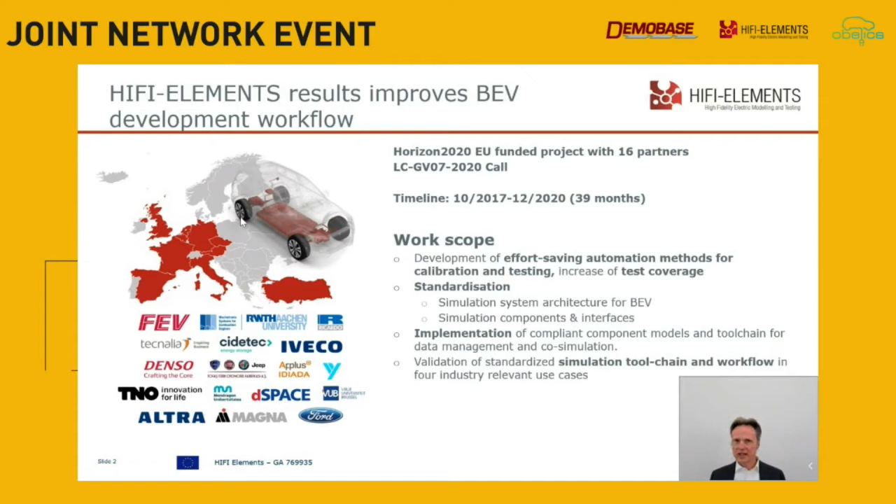All of that is being validated, not against, let's say, 11 use cases, but we have 4 industrially relevant use cases; currently it's still ongoing. And I'm happy to show you our results. We are 95% finished now, how far and what kind of results we can gain with our developments. So I want to make it very simple in the very beginning, because there are lots of technical things that you will see during the run of the day.

Where do we need conventions when it comes to simulation and testing of battery electric vehicle components? Very simple, you have this vehicle here, and I will just pick out 3 of these components: the battery, the inverter, and the e-machine next to the mechanical transmission. And that needs to be simulated. How do you do this? You want to do this, for example, for model in the loop, where you just do the simulation, but later on you also want to pick out one of these components for hardware in the loop, where the rest of the whole vehicle is being simulated.

I will leave out the thermal discipline. I will leave out the controls, that comes later. So we know the physics of this. There are electrical currents, there are torques that have to be modeled. These modeling components have to exchange signals. And sometimes it's very easy to do it. For the mechanical system, the e-motor has to communicate the torque to the transmission and finally to the vehicle wheels, while those will feed back the speed of the rotor according to the speed of the vehicle.

Also, the communication of the signals, it's not really that you have to model plus and minus currents. You say, okay, I have to model the signal of the electrical current, which goes from the inverter, what it wants from the battery, and the battery finally tells, based on that and the current state of charge, what voltage the battery can deliver.

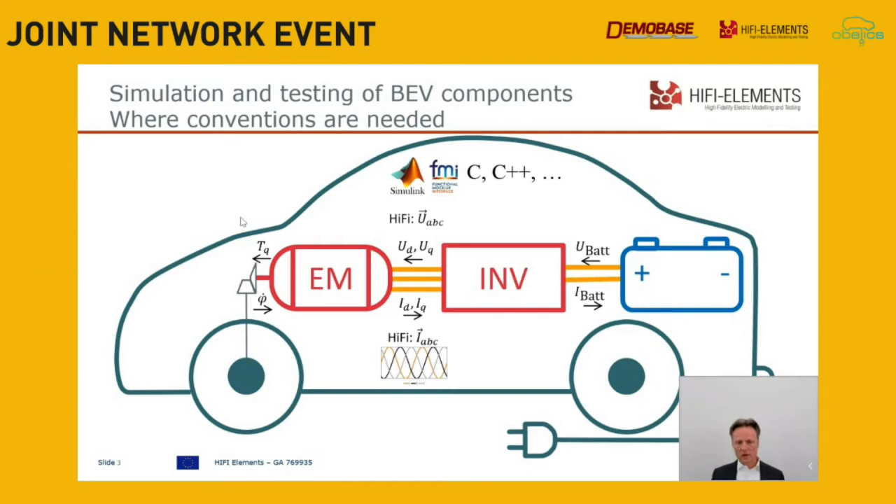If you see this in a bigger picture, for example the simulation or development procedure, you start in different phases of the development of your battery electric vehicle. You start in the project concept phase in the very beginning, and you want to end up with your vehicle investigations or the test bench investigation. Initially, you have very fundamental questions like, what is the best vehicle concept? How many EMotors do you want to have? What about the battery? What capacity do you need to fulfill all the requirements from the customer level?

What kind of EMotor do you want to have? Do you want a permanent magnet machine? Do you want an asynchronous motor, on which wheels, front and back? Maybe you want an EMotor on each of the wheels. This is what you start to think of, and then you start to talk to the suppliers. Initially, you have just very rough approximations of how these models will behave. Once you have made the decision, you start to discuss detailing phases with the suppliers.

You will then switch the focus from the system level to subsystem levels, where the individual development teams start to optimize the subsystems in more detail with the information from the suppliers. Where before you worked with low fidelity models, here you start with high fidelity models. You have very high time resolution, and you do simulation and optimization, but it's not real-time capable. But when introducing controls in the subsequent steps, you have to become real-time capable. So again, you have to switch your models and go back to low fidelity models, but real-time capable.

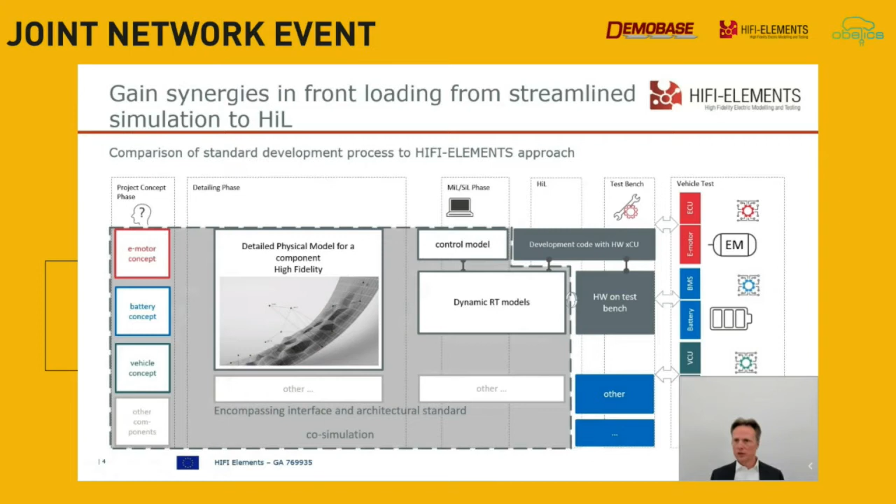We also introduce co-simulation, which helps you integrate heterogeneous simulation tools. So you don't have to limit yourself to FMI or FMU only, but you can also include, by means of co-simulation, commercial tools like KULI, GT-Power, AMESim, and so on. So this is basically what we want to do. And how do you do this?

The idea we had is we want to have this in a very holistic way. Usually this process is depicted in two dimensions. You start with the customer value, you start the requirement definition, you start the implementation. At the end, when you have the realization, you go up and do all the test cases. When diving down this process, you decompose your steps with the decomposition of your system into the subsystems.

We wanted to have a front loading of the requirement definition, and we have adopted a procedure which stems from the method of model-based testing of software-based functions, because our observation was that different stakeholders each have different views on the system or parts of it at the same time. So in order to allow interdisciplinary front-loading of development activities by the different stakeholder groups, we introduce another dimension in this development process. Next to the dimension of system abstraction, we allow also for an additional decomposition of the system into clearly arranged and manageable subsystem views.

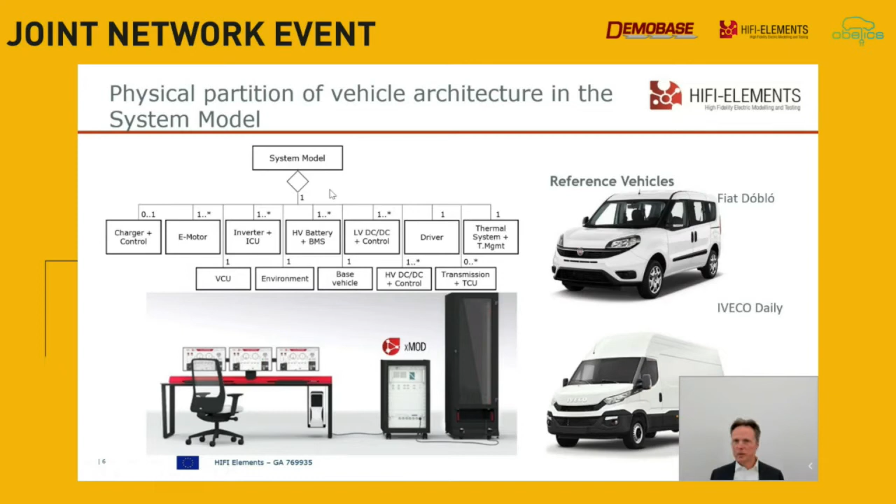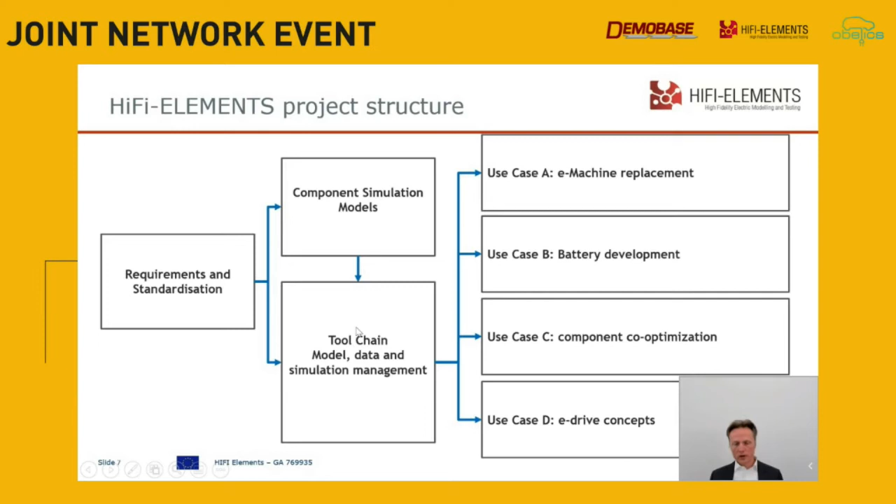So this is, in very brief words, the HIFI-ELEMENTS project structure. You see here the work packages which are technically related. The first work package here took care of the requirements and standardization, which I mentioned before. The component simulation models were another work package, and the tool chain, the model, the data, and the simulation management was the third work package. You will learn more on this in the first presentation, which is called Proposal for a Simulation Standard and a Simulation Tool Chain. And all four use cases, two each, will then be presented in the subsequent two presentations from HIFI-ELEMENTS.

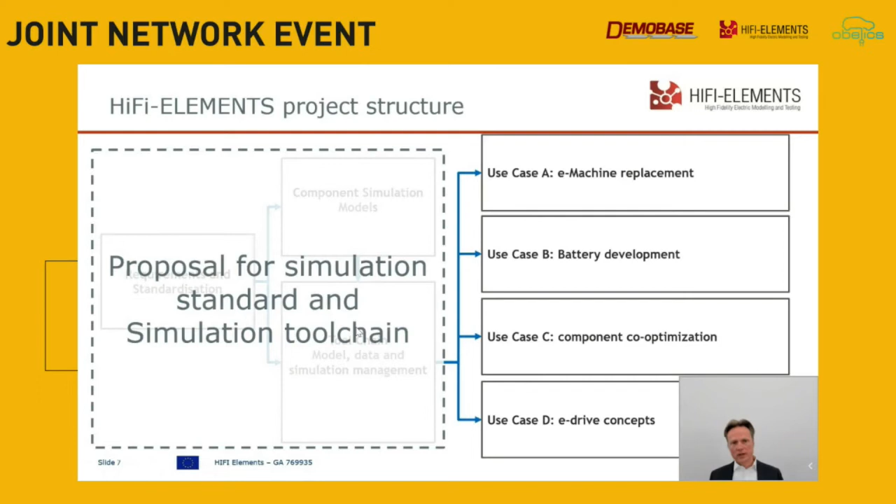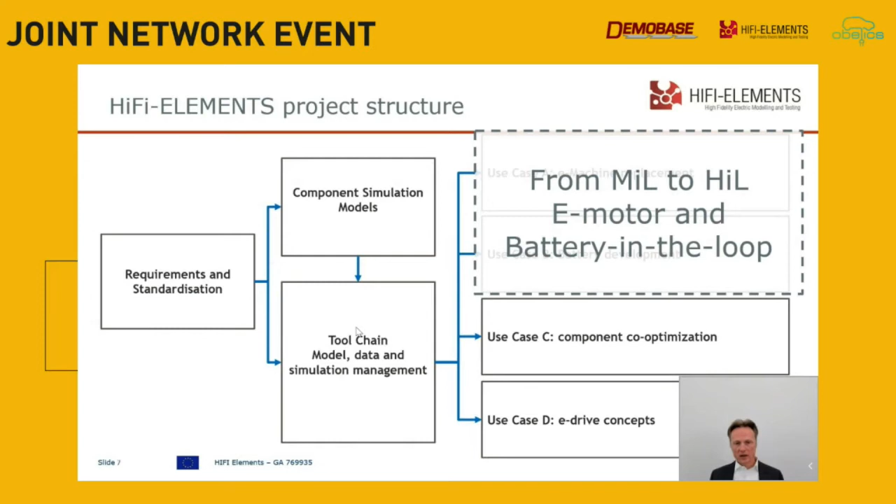The first use cases, which circulated around e-machine and battery development, are called from model in the loop to hardware in the loop, because this is what they did. So you will learn more on that. The remaining two use cases took care of the topic of optimal operation strategies and the simulation for an optimal BEV concept.

So what does that mean in detail? What will you learn? In booth B, first of all, we will explain to you EleMA, which is our electric modeling architecture. This is an architectural standard proposal that we have developed and published, and you can use it for free for your own work. You can download this from our website.

So it does not only comprise the two vehicle architectures of the two vehicles that I showed before, which are front and rear wheel driven BEVs. We introduced more architectures of this kind, even such fancy things where you have an EMotor for each of the wheels. So this is the one thing.

The second part is we will explain to you the simulation tool chain and its data management. It's all centered around the software SYNECT from dSPACE, which basically drives our whole simulation approach. It manages the component models and makes sure that their integration works by corresponding validation of the interfaces of the component models, so that you know that what you're plugging together will at the end lead to a final successful simulation. It performs the actual simulation just by triggering this.

It also helps you to automatically generate and run test cases. So when it comes to testing, we have a testing language which is called TEVET, which can generate many test cases at the same time, for, let's say, functional testing.

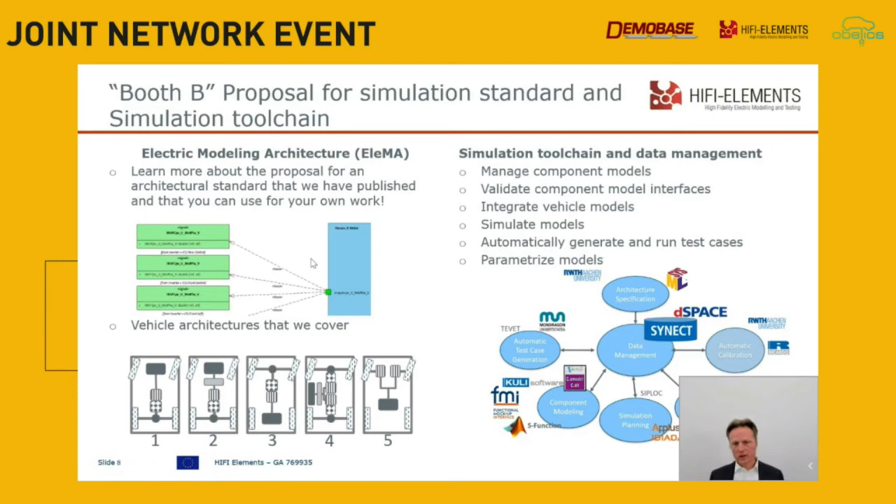The second one, as I said, will cover from MiL to HiL. For the EMotor in the loop, we will show you that we are able to run an EMotor on a test bench in a transient way, as if it was in the simulated vehicle. And by means of our developments from HIFI, we show that we are able to perform changes in the virtual and real components with minimized effort. So it's basically plug and play between different EMotors.

And in this specific case, we show you the comparison from model in the loop to hardware in the loop, which of course helps us to improve our development because we have much quicker turnover times.

When it comes to battery in the loop testing, the proof here is a battery prototype module, which with our developments could now be tested in early stages in a controlled environment with high repeatability. And both of these hardware in the loop test cases are coupled to a realistic vehicle model already in the early stages of development, which we had behind because of the component models which were developed and which I mentioned before.

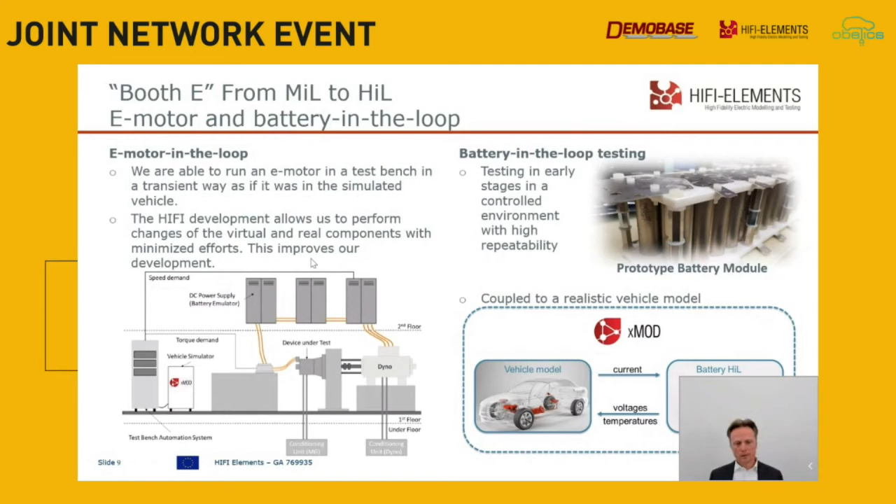And when it comes to the last of the three technical presentations, first of all, the industrial electrification project is one where the partners exercised the high fidelity model exchange between stakeholders quite intensively, to see whether the objectives that we had set ourselves really work. They used the project toolchain for quick and seamless interaction and used scalable models, going from high fidelity models to low fidelity models. How does that work in practice?

And they did real environment testing to calibrate models for the vehicle, for example, and did real route mission profile optimization. So here controls come into play, of course. What kind of control strategies can you develop for a vehicle in terms of road profiles and so on, to see how much energy we can save if we have the possibility to test our vehicle control strategies by means of this.

The last part of that is the determination of the most efficient powertrain configuration by simulation front loading. This is very similar to the project concept phase I showed on the very first slides, just to switch through the different models and also implement different temperature protection derating methodologies to come up with the optimal configuration of the final model that we want to use.

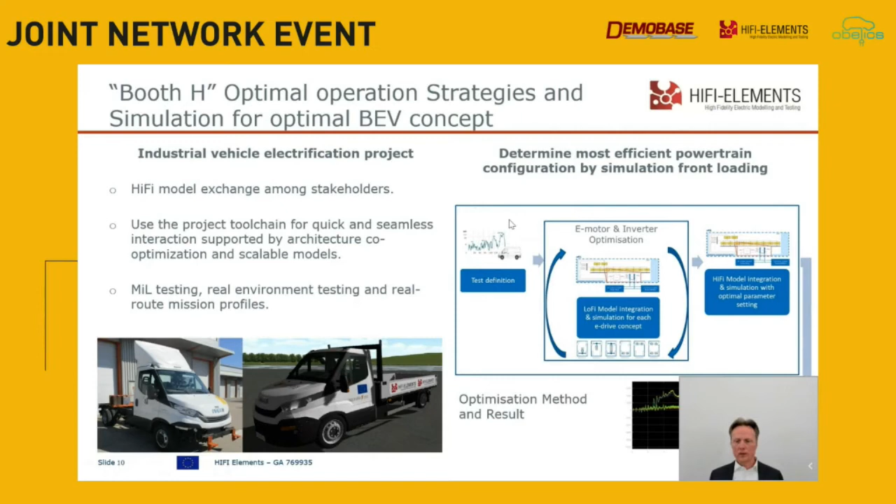Okay. So at the end, to the topic of how much we can reduce our efforts by the developments of HIFI elements, because this is one of the main objectives of this project. Here you can see what we think, from today's point of view, how much we can optimize. First of all, we consider the whole procedure from the simulation setup of the architecture, the generation of the component models, the adoption of the simulation models between the different fidelity levels, up to the final test plan setup and execution.

We have calculated the reduction efforts by all of our individual developments. So what we had postulated was this predefined architecture, which is called 150%. And what this means, Marcus will tell a little bit more later on. We think that we can, let's say, reduce quite drastically all our efforts here.

And at the end, we believe if you sum this up, just for all the efforts until you start and trigger the simulation, we can come up with, let's say, a reduction of overall 60 to 70% in the manual setups. And at the end, you can decide by yourself for which benefit you want to use these achievements. Either you use it for a quicker simulation turnover, or you invest it into increased test and simulation coverage. Basically, it's up to you.

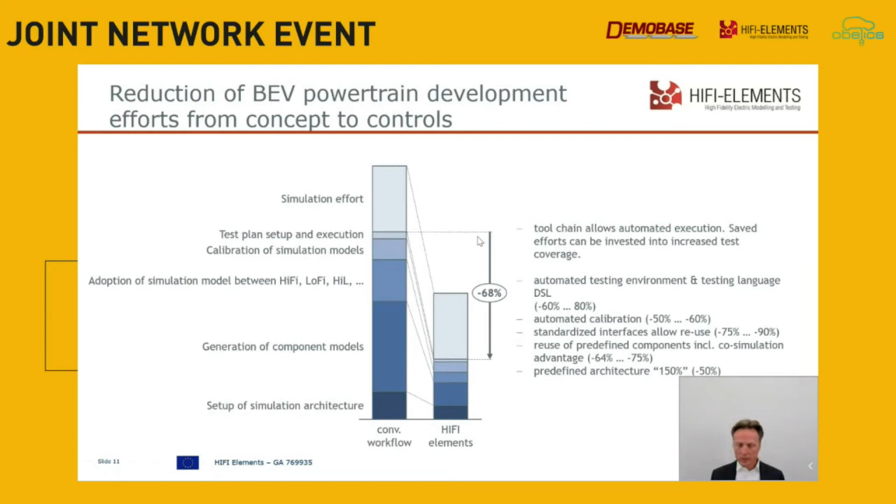Well, coming to the three projects here, OBELICS, DEMOBASE, and HIFI-ELEMENTS, they are all members, as you may have already understood, of the same LCGV07 research cluster within EU Horizon 2020. And when they wrote their proposals, of course, they did it in some kind of a competitive manner, and until the grant agreement came from the EU, we started to collaborate anyhow. And that's all, I think, also good.